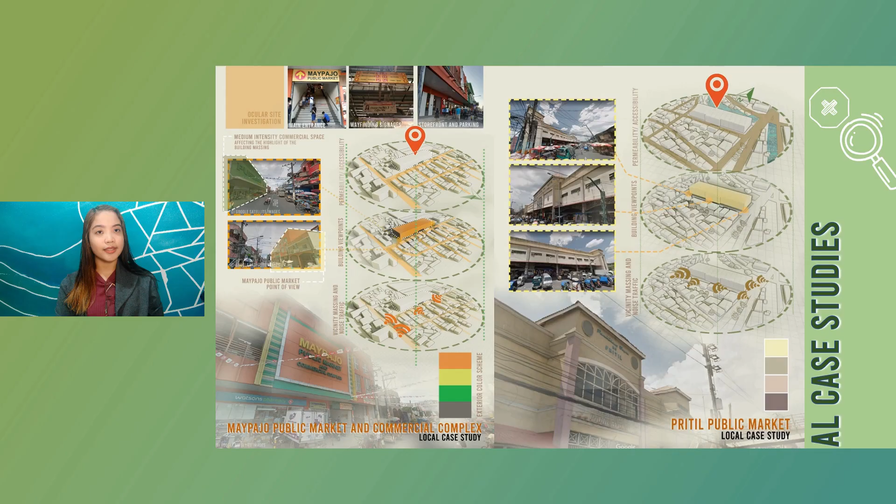As existing local public markets have been evaluated in this research, like Maypajo and Pritil Public Market, alongside the interviews conducted, most of the impressions, typically negative connotations such as masikip, mabaho, lack of ventilation, have been the stigma of these facilities. Thus, all these factors affect the vitality of the place. There are many reasons why people go to a public market, and with the findings in this study, experiences are not usually heightened because of how the space is structured. Palenques should fulfill both the needs and wants of the community.

With its historical background from the Spanish Revolt up to this present day, agriculture has been the primary economy that sustained the life of Silangeños. Corn, coffee, pineapple, to name a few of its primary crops. Silang is also preparing to be a city given its land area, population, natural resources, and human potential.

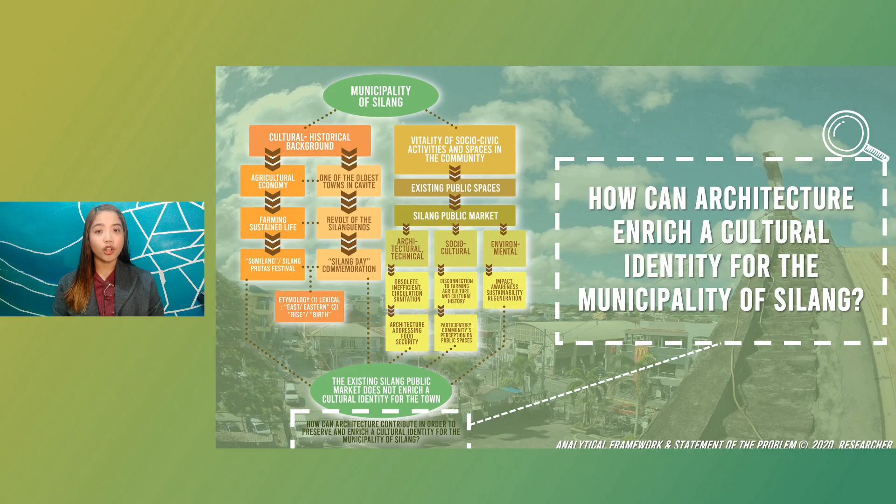With a formulated analytical framework and statement of the problem, this research answers the question, how can architecture enrich a cultural identity for Silang? Silang Public Market can be of great potential in addressing food security through architecture, connect people to agriculture, and transform as an agricultural ecozone.

The old market building should be demolished due to its structural inadequacy and other conditions, while some buildings may be retained but repurposed for the project, which is entitled Silang Socio-Civic Multiplex, the revitalization of Silang Public Market through the synthesis of placemaking, which facilitates creative patterns of use defining the sense of place, and multiculturalism, which nurtures existing distinctive qualities and resources. Having that said, agriculture will be utilized, integrated with architecture as a strategy.

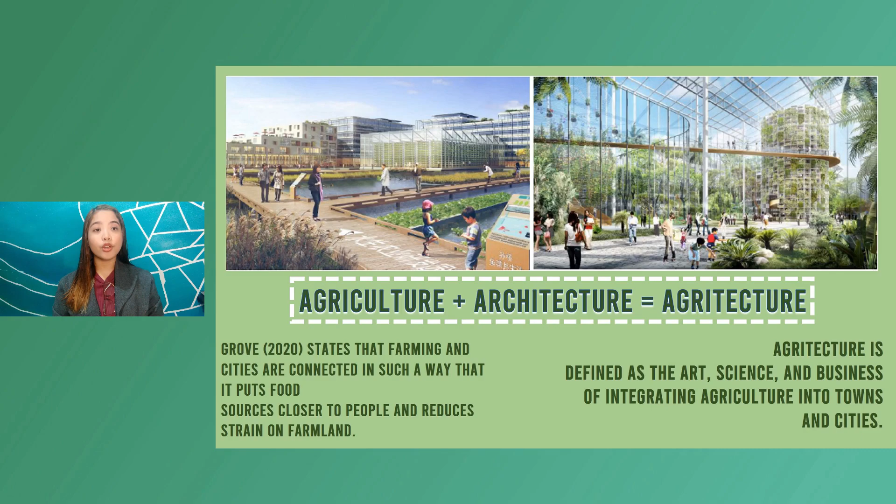Agritecture demonstrates the importance of farming, connects in such a way that it puts food sources closer to the people. A comparative analysis of case studies has also been conducted to identify the least and best applicable for the project.

For the foreign case studies, Sydney Fish Market in Australia conceptualized openness and connectivity to its aquaculture. The design was able to achieve robustness and variety of its spaces. As for Rubí Public Market and civic offices in Spain, the design achieved an efficient circulation and developed a public space in its foreground. Aside from these typologies, Van Gelder Taste Valley Vegetable and Fruit Headquarters, the most applicable in the project, achieved agri-ecotourism platforms and developed climate-smart agriculture.

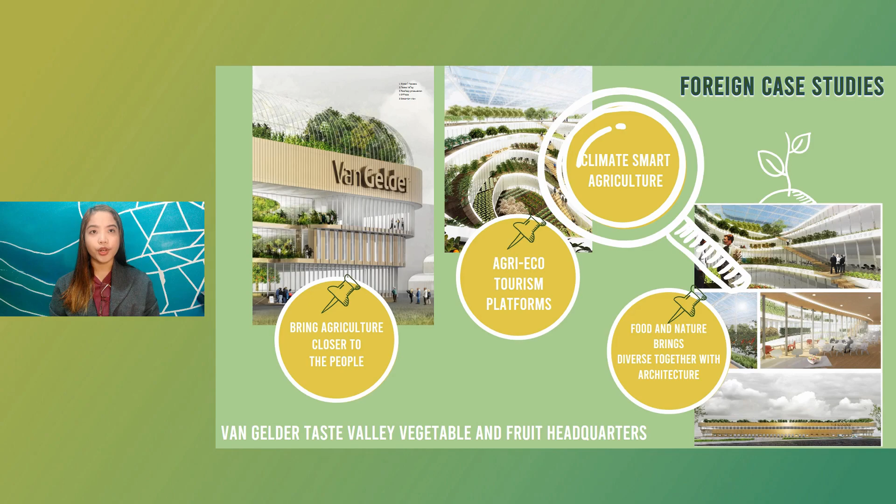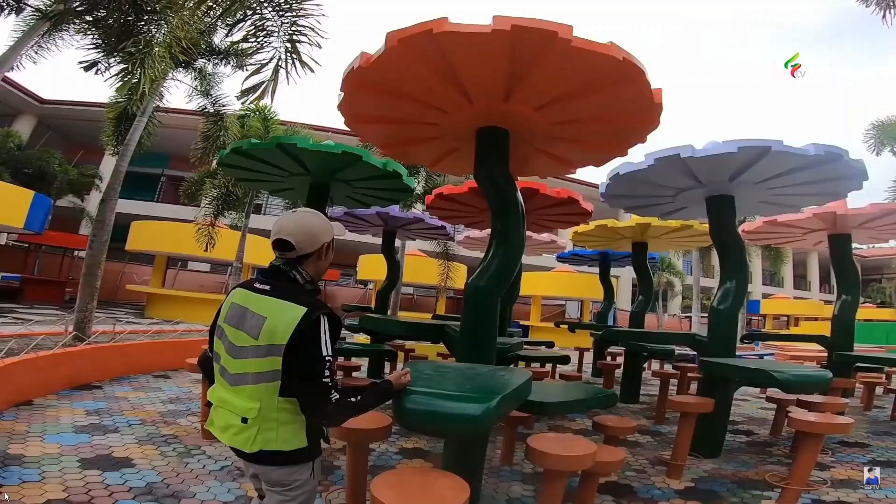Food and nature brings diverse people together through its architecture. Aside from the local public markets mentioned earlier, there are still successful exhibits of public markets in the Philippines, such as the Maramag Public Market in Bukidnon, considered as the cleanest public market in the country, which also adapted the local economic enterprises, and the most applicable, which is the Palo Public Market in Leyte, which utilized the courtyard design as an active park and public space. Its design was able to achieve the sense of place, inclusiveness, and improved accessibility.

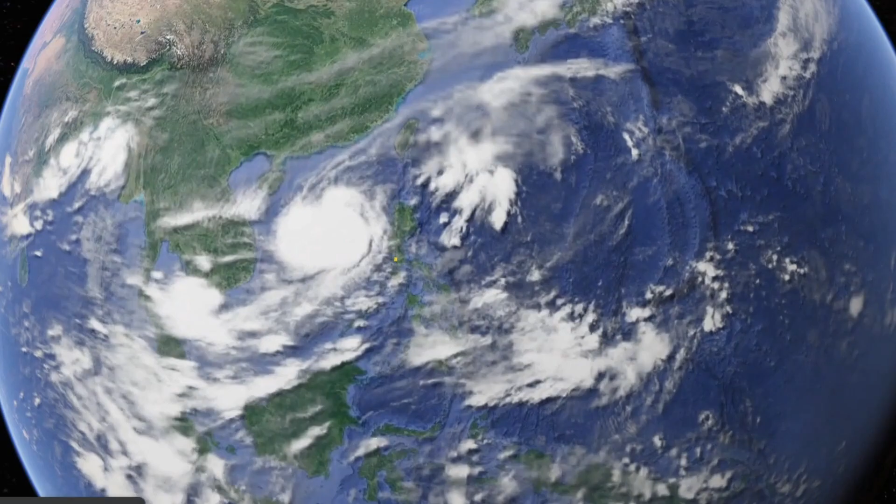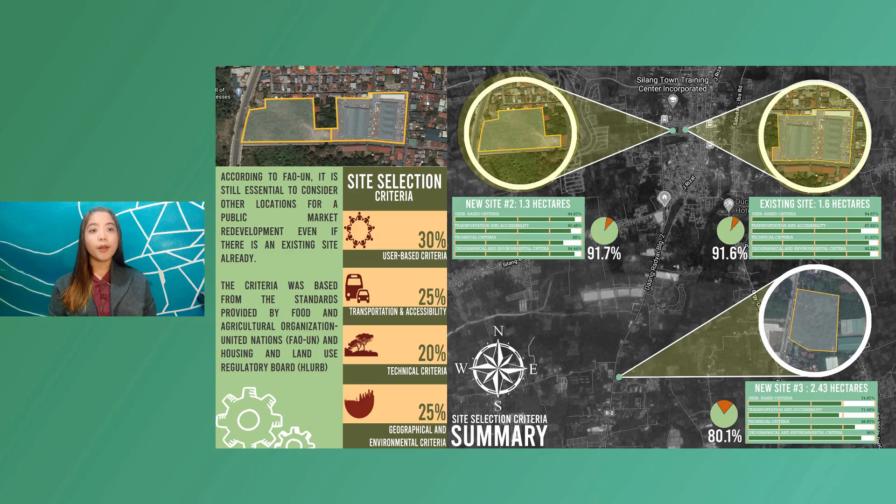According to the FAO-UN, it's still essential to consider other sites despite having an existing site subjected for redevelopment. With that, lots within the Central Business District of Silang have been considered. Evaluating the three options with the formulated site criteria, the existing site and the second option have approximate results primarily because these are two adjacent lots. As concluded, it will be a lot expansion, combining 1.3 and 1.6 hectares, now a total of 2.9 hectares.

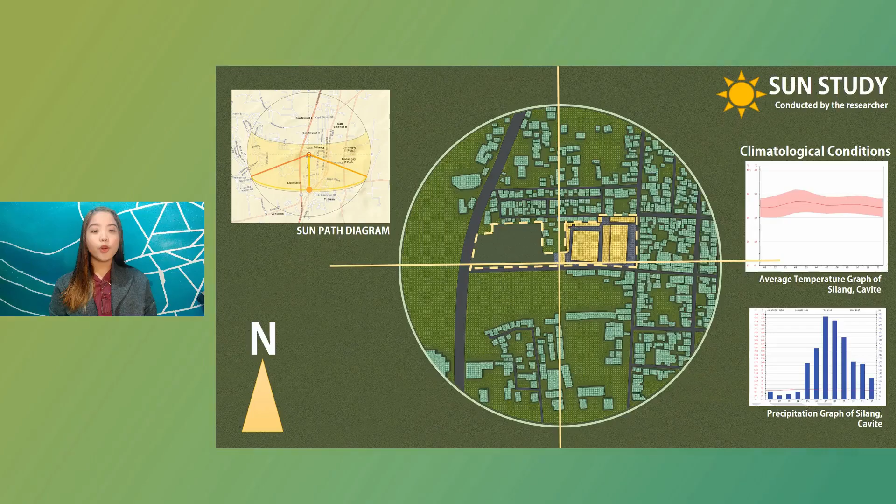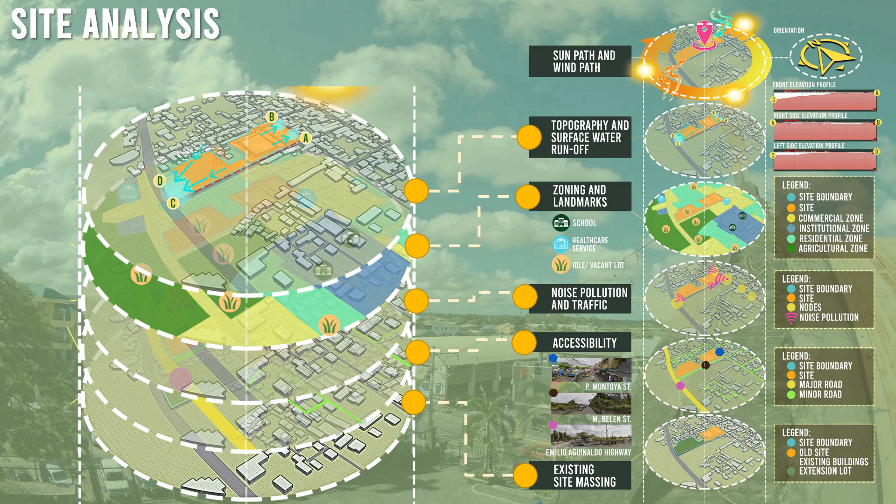As for the zoning and landmarks, it is surrounded by residential, commercial, idle agricultural lands, and is also proximate to various schools which can determine the potential users of the project. As for the topography and surface water runoff, the site is not flood-prone, but there are potential areas that can be of water buildup. Demonstrated earlier, this is the sun path and wind path analysis that is a vital consideration in the orientation in the planning phase of the project.

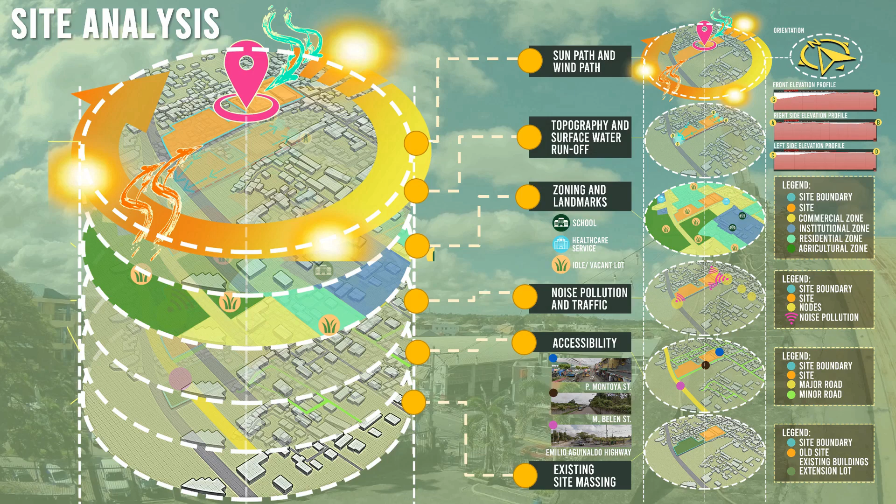Aside from the consumers, farmers, and vendors, the potential users can also be specifically students and tourists. Analyzing behavioral patterns, it is evident that active timeframes of the users vary. In addition to this, the existing market channels also justify the need to develop a local transport hub, not just for docking and delivery handling areas, but also to provide better services for the users from both urban and rural communities.

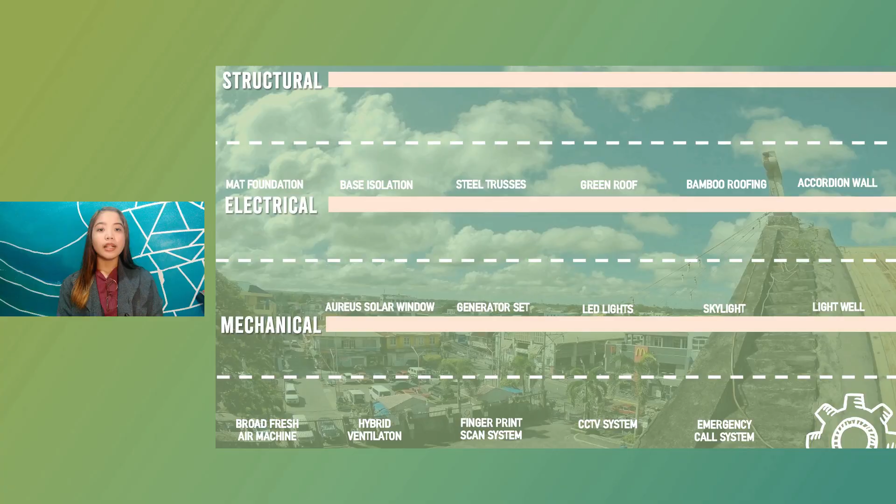These are the innovations and environmental systems that will be adopted in the study. And the notable strategy, a recent invention, is AuREUS solar window, which utilizes fruit and vegetable compost into an alternative energy source. For Silang's present practices, used cooking oil and soft plastics have been innovated as eco-pavers and ecobricks.

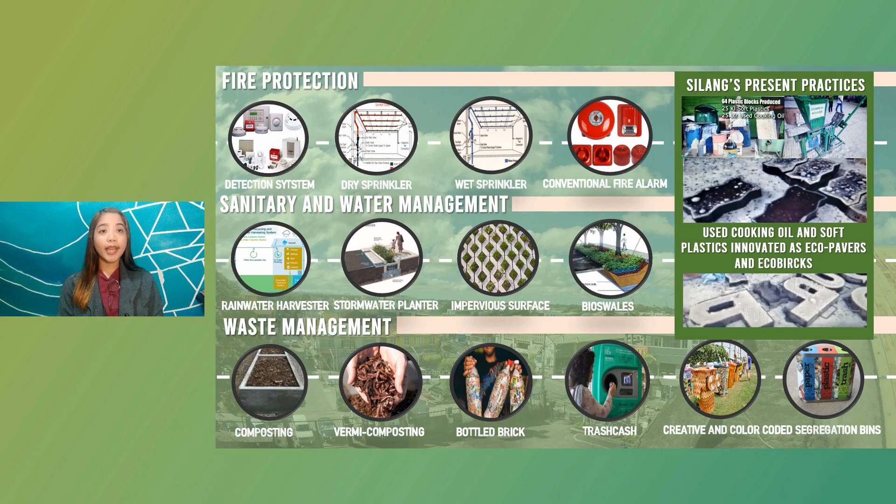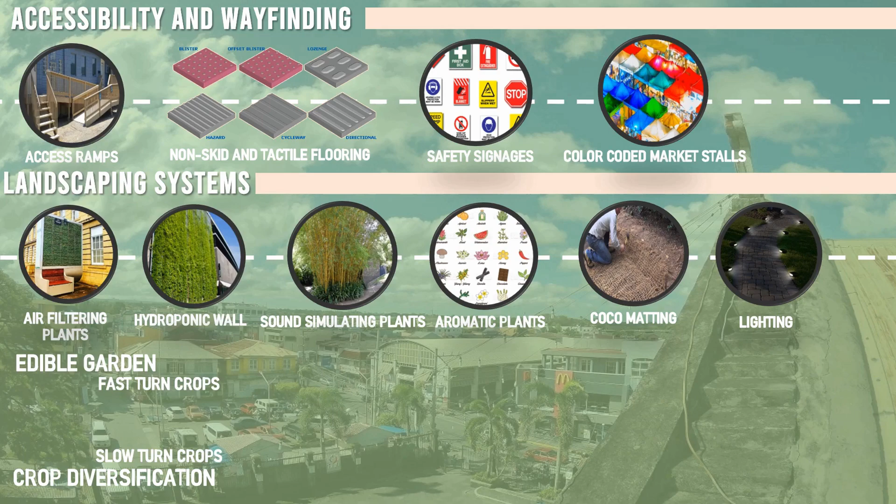Creative and painted trash bins also contribute in achieving placemaking, while color-coded market stalls help users navigate the spaces and identify various market zones. Edible gardens will also be a landscaping strategy, and this will adopt a crop diversification in both fast-turn and slow-turn crops, achieving climate-smart agriculture. Urban beekeeping will also be adopted, functioning as assistant pollinators for flowers, plants, and will be located in less activity areas.

Culture shapes architecture. It can be learned, shared, or integrated, and with these characteristics, it is now time to bring agriculture closer to the people through architecture. Since the community should be the expert, we should let people make places.

With a conceptual framework formulated by the researcher, design inspiration will be conceptualized through form translations, visual symbolisms. Design sensibility considers the sensory significance of various color schemes, and even how courtyard concepts alleviate dense areas, enables transparency and avenues for state-of-the-art spaces.

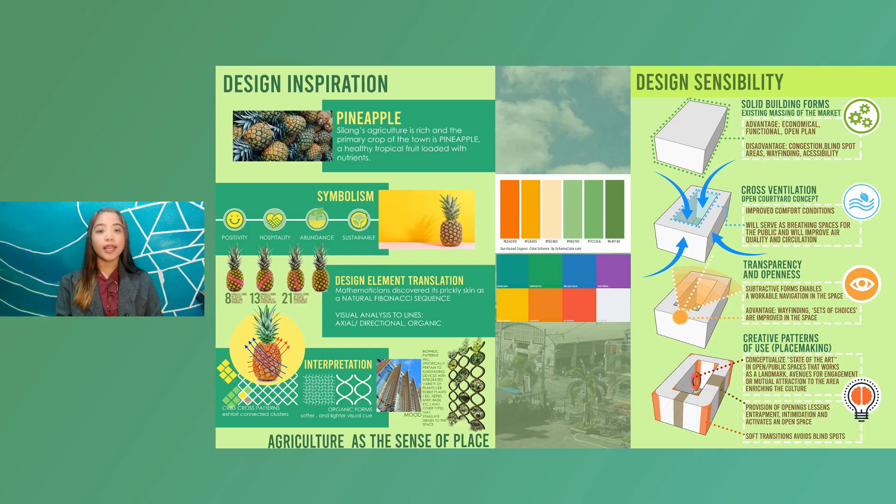Design innovations like edible gardens enable a garden-to-table approach, where people can pick their own food, educated about plants, gardening, encouraged to be naturalist. As for Silang, they also have platforms where married couples should plant a tree. This does not just allow personalization of the public space, but also it is a fulfillment of social responsibilities. Murals can also serve as attractions together with interactive public spaces.

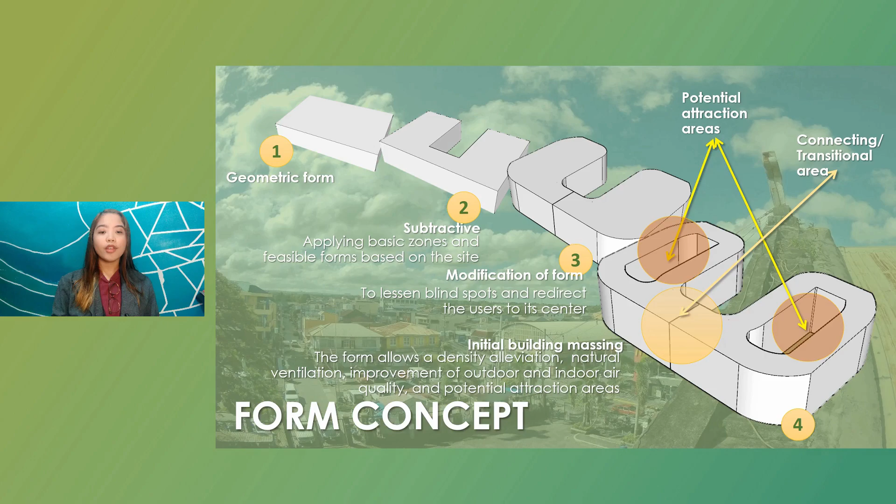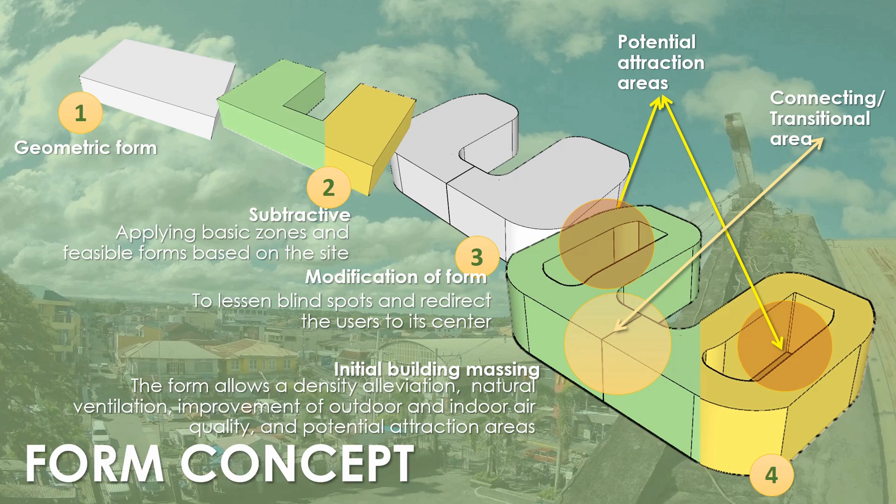In relevance, to provide avenues for these strategies, the form concept required modifications where there can be potential attraction areas, and furthermore will be discussed is its functionality. The economy concept will comply to the standards of agricultural tourism, offering opportunities not just for the farmers but for the whole community of Silang. The sustainability concept highlights circular economy.

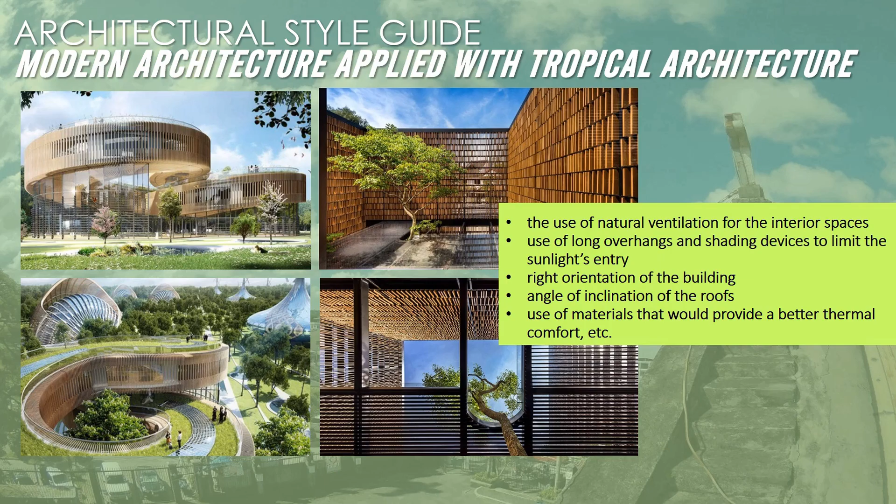The architectural style guide will be modern architecture applied with tropical architecture. For the manner of financing, aside from the Department of Agriculture, which assists farmers, and the Municipality of Silang, other prospects are IIRR, also located within the municipality. They conduct main initiatives for climate-smart agriculture in the town, and JCI Silang Cattleya on UN's SDG-related projects.

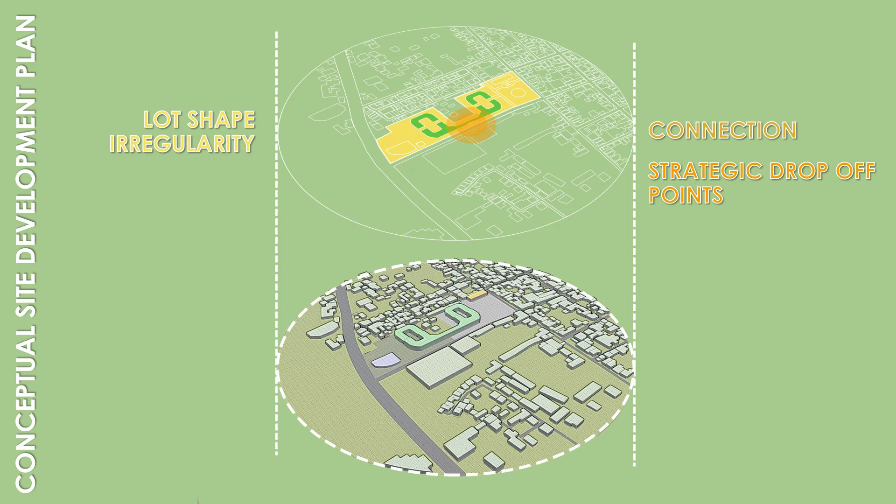Proceeding to the conceptual site development plan, the form was modified into this to provide a connecting area because of the irregularity of the lot shape. This also leads to strategic points for drop-off areas. The main location for the thematic parks will be oriented on the eastern side, functioning as a density, alleviation, and transitional space.

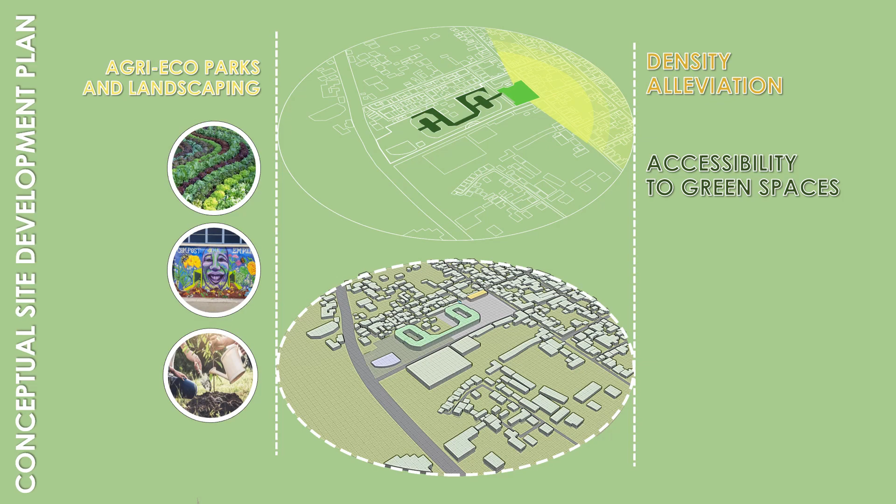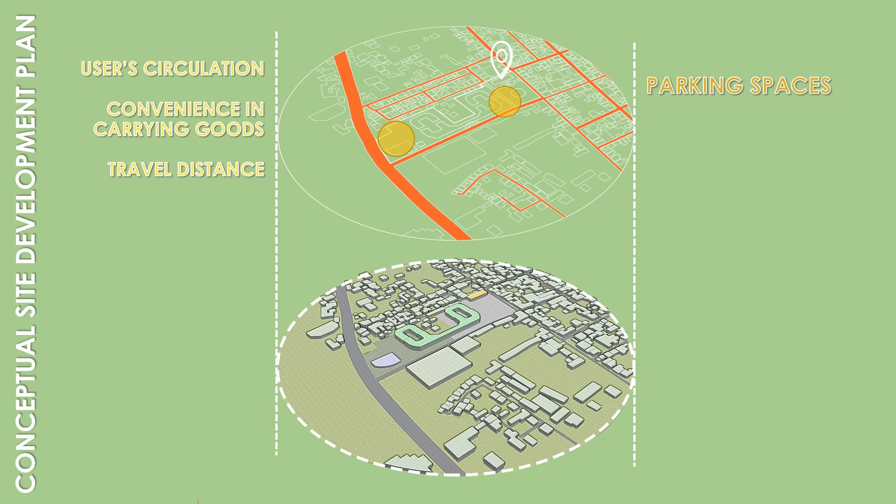There will also be connections to courtyard spaces alongside the main building, space for temporary market stalls, especially during cultural events, edible gardens, and other attraction areas that will heighten the experiences in the public market. Parking areas will be distributed alongside the building, considering the user circulation, convenience in carrying their goods, and travel distance. The newly redeveloped car park will be repurposed as the admin building, considering the existing pattern of linkages in the site. The location of the transport hub is at a strategic point, which is the Emilio Aguinaldo Highway, that mainly accommodates buses and delivery trucks.

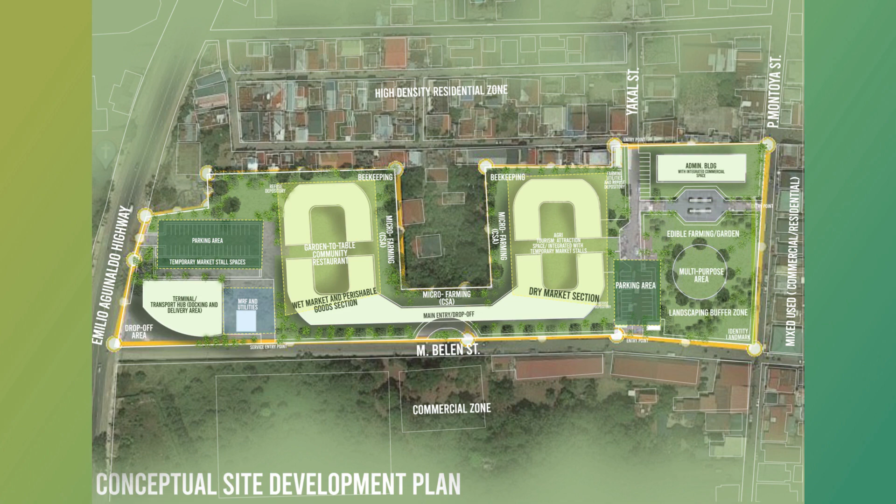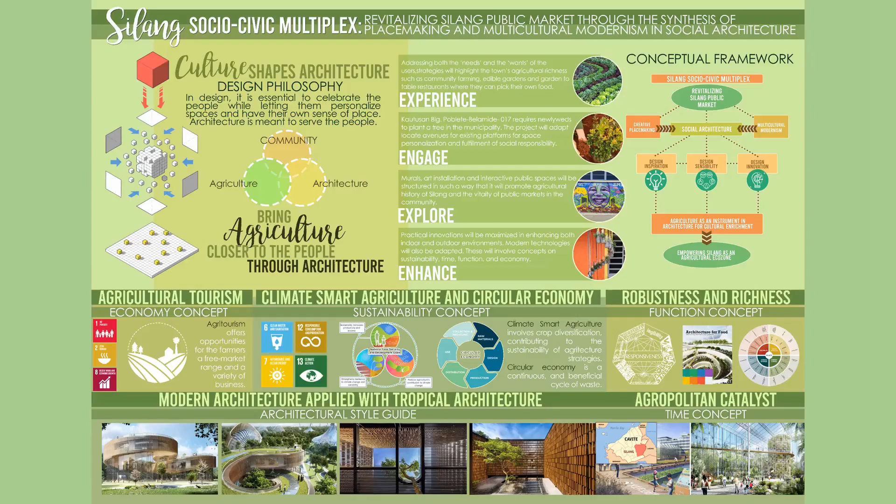The diagram shows the synthesis of the conceptual site development plan.

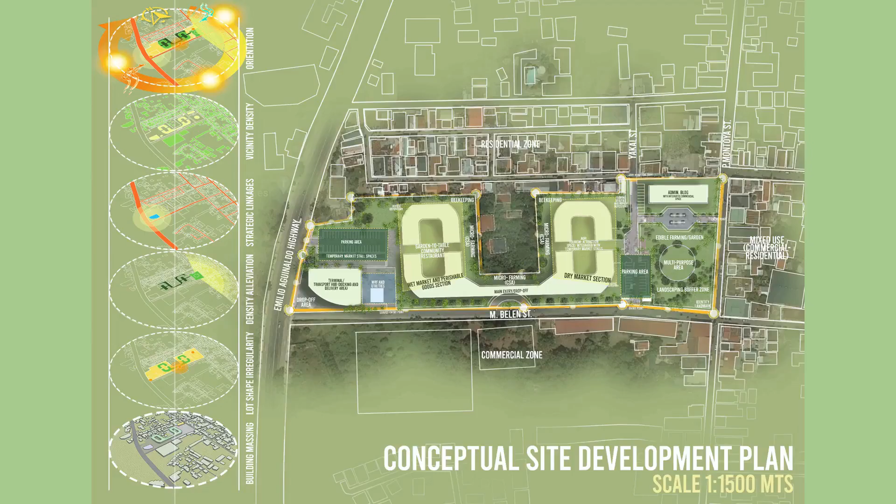This concludes the end of the presentation. I am Maxine Loyola Naval, the researcher, presenting to you my thesis entitled Silang Socio-Civic Multiplex.